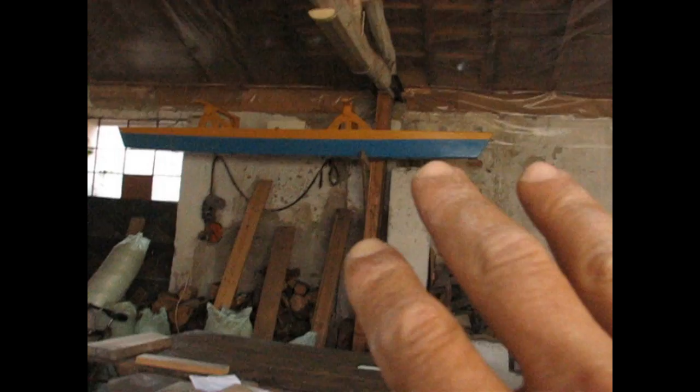This is almost, I mean, there's a 4-meter ama, that's Make or Break's ama. It's got some of these characteristics in it and it works well, so I've enhanced stuff over here and I've gone to this. So basically it's a V hull up to here, and then there's a flat bottom so it can accept a dagger, and then it's a V hull again.

So I always like rake on bows. It helps, it guides the bow up the wave. And then I like it when it builds flare. I like it building a lot of flare pretty soon. So then the volume brings you up again.

Then I like a little bit, okay, so I've used less rocker in the past. I've used more rocker on Crystal Clear, and then later on I've used less rocker. Now I'm back to a little bit more rocker. Rocker again helps you up.

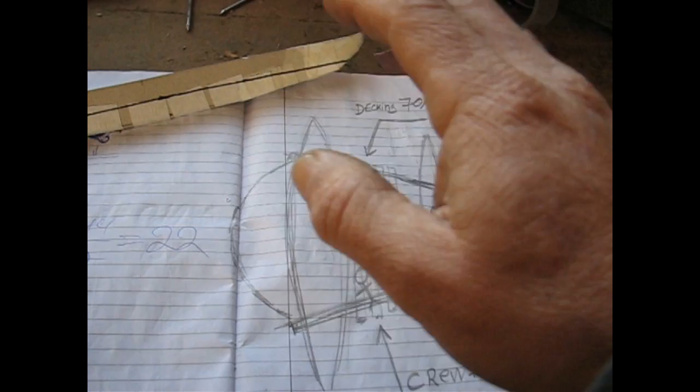So before I build my cardboard models, I will roughly know the sizes and the volumes I need, because I will do this. This is a quick calculation that will tell me how much weight this ama will have to carry, including itself, and what volume it will have to have at waterline. So I'll draw out the whole boat, roughly to scale, doesn't have to be very perfect.

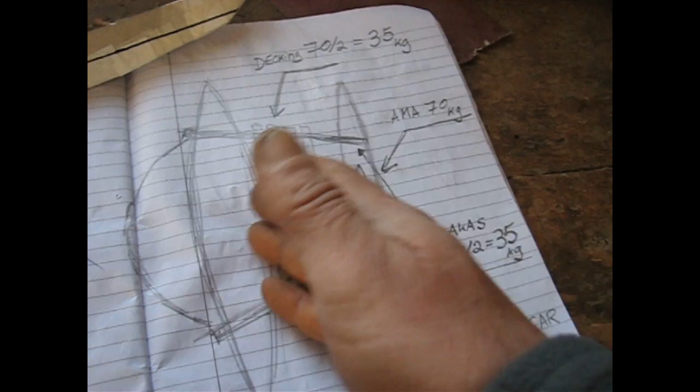And I'll start calculating the weights that are coming onto this ama. So I've got over here decking. I've come to the weight of my decking. I've calculated everything. I know the weights of the materials, and I know how big it's going to be and stuff. 70 kilos of decking divided by 2 is 35 kilos coming onto the ama, because half the weight of the decking is going onto the vaka.

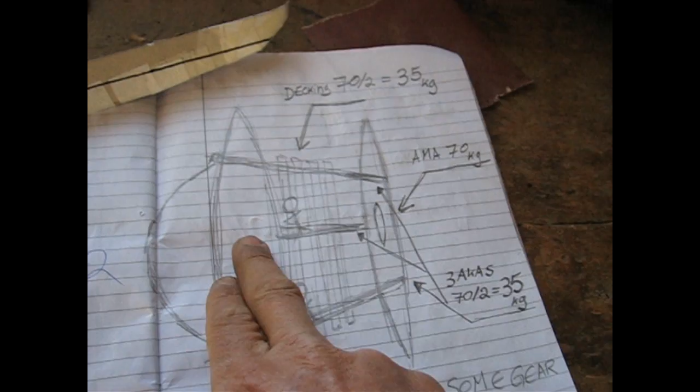Then the ama itself, I'll calculate the amount of plywood and figure out its weight, and I'll calculate the weight of the dagger board, and I'll find all the weights over here involved, and I'll come out with 70 kilos.

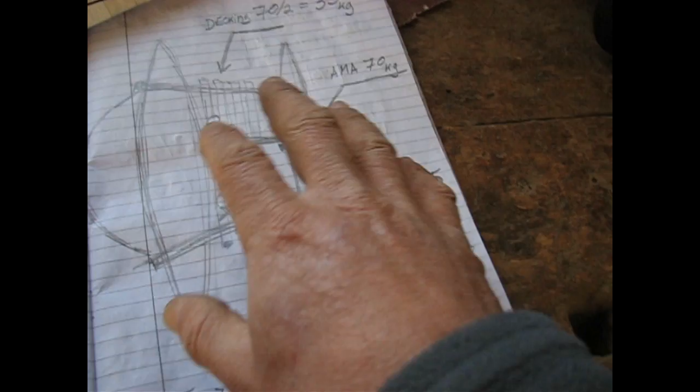Then I'll take the akas. I've calculated the weight of my akas. I know how big they're going to be and stuff. So I come out with 3 akas, 70 kilos. That again I will divide by 2 and come to 35, because only half of the weight of the akas is onto the ama.

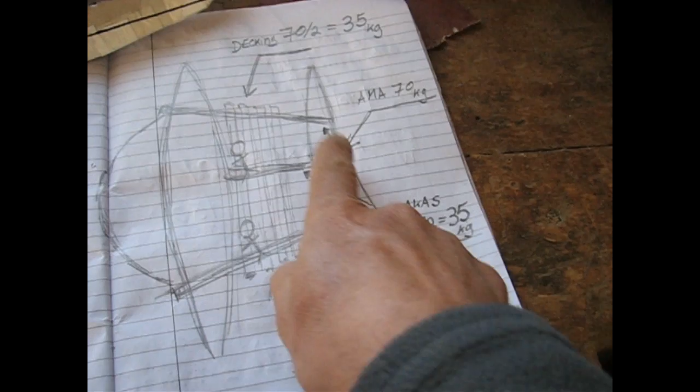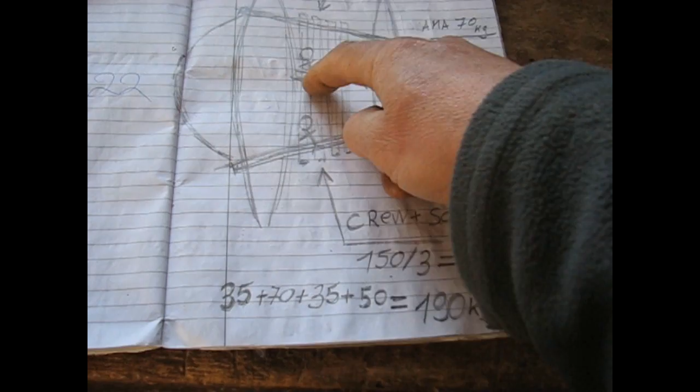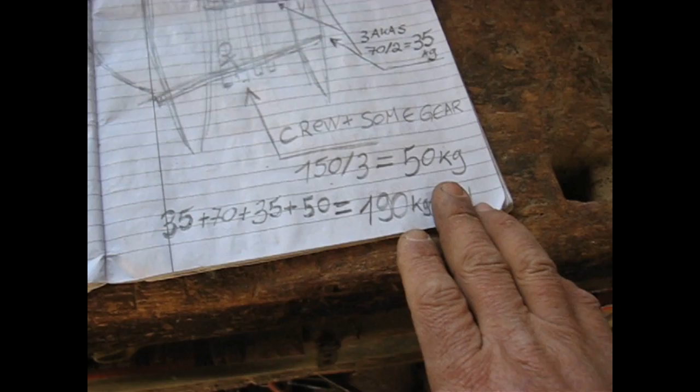Then I'll put crew and gear, because I might have some anchors over here, boxes with anchors and stuff. So the two of us, me and Zhenya, will be 120 kilos. So let's say I'm allowing for another 30 kilos of gear that will be here in this area of the boat. But because this is not in the middle, it's closer to the vaka, this weight, which is 150 kilos, I'm going to divide it by 3, and I'll come out with 50 kilos. And there you have it. So it's 35 plus 70 plus 35 plus 50 comes out to 190 kilos.

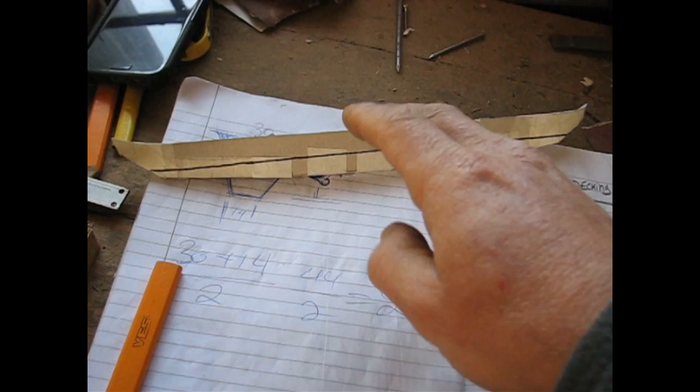I know that this ama at waterline must have 180 liters of displacement. Now, once I've built the ama, I can measure and make sure it's there, and if it's not there, I'll make it again. So this ama is there, and I'll show you how I calculate volume now. Okay, so let's calculate the volume of this ama at waterline and see what we have.

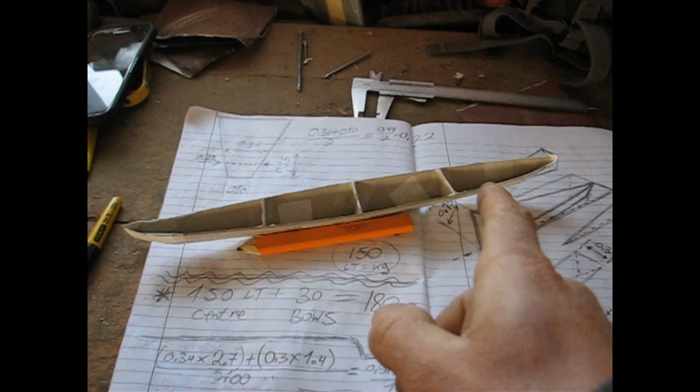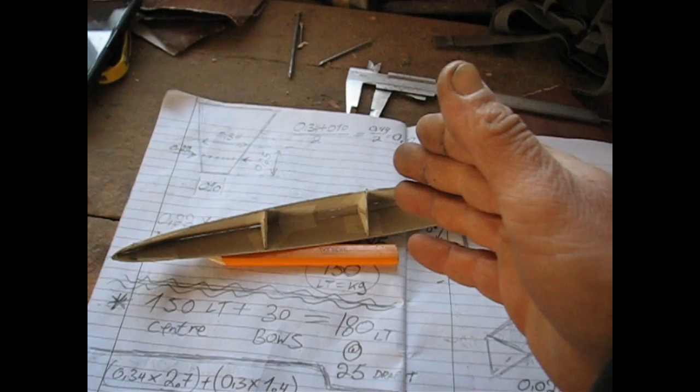So this is what I love about proas, they're symmetrical. So these two compartments are identical, and then that bow and that bow are identical. Okay, so let's start off with these guys, the easy ones. So over here it's narrow, over here it's wide, this compartment. So I'll work on the middle. I want averages. I want to just average everything out. I'm not looking to be super perfect, and this is how I've done it many times, and it's always worked. So I'm sure that this is just fine. So that's the average. We're going to work on the middle.

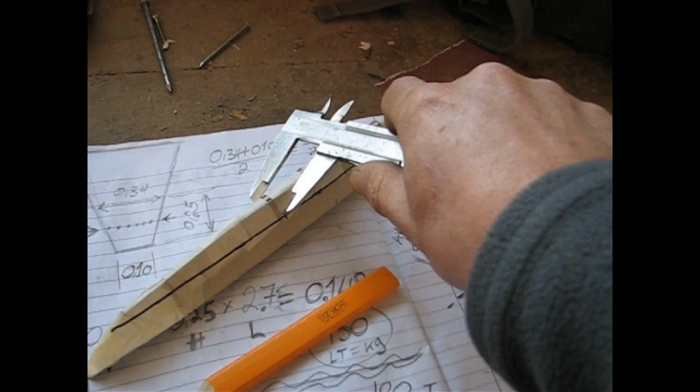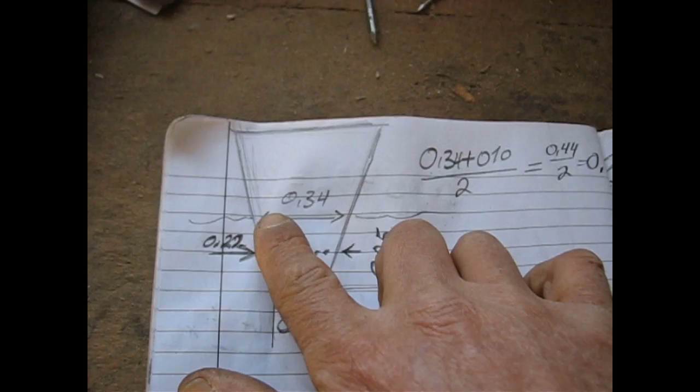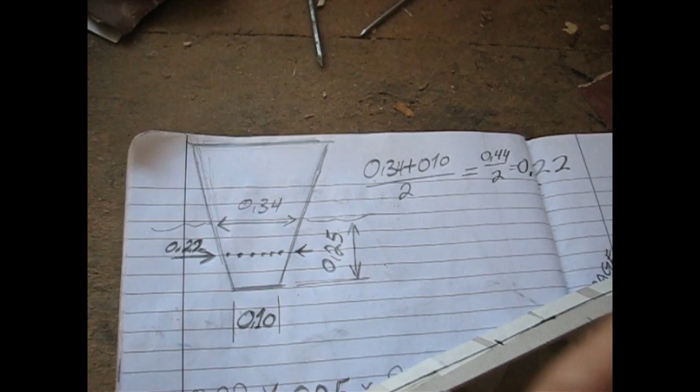So here's the middle line, and here's my water line. Pick up a pair of calipers. I'm looking through the camera, so things are kind of slightly hard, but that's okay. And let's say I'll measure this, okay? I'll just measure it like that to water line, exactly in the middle. And I came out with 34 centimeters. I'm working in meters, so I divide everything by 100, because I'm looking for cubic meters, which is a ton of water.

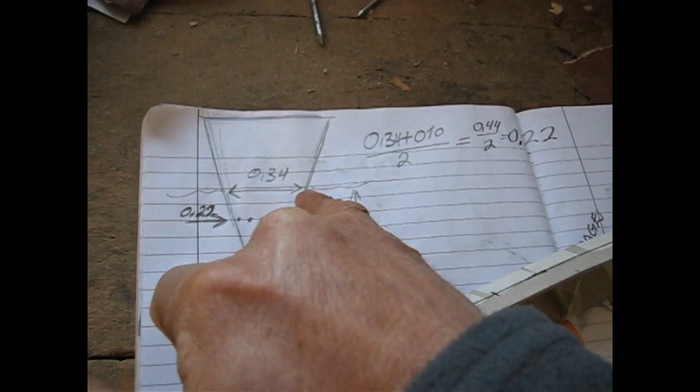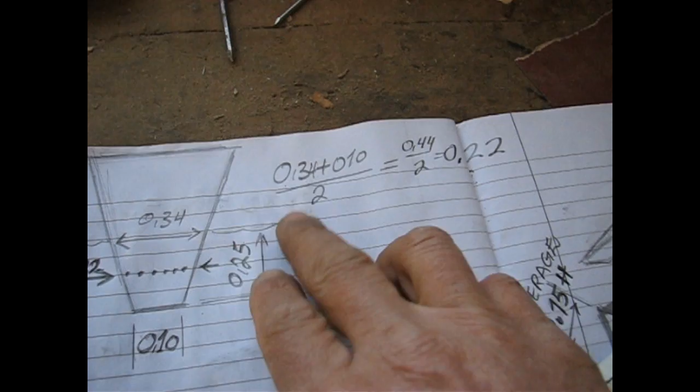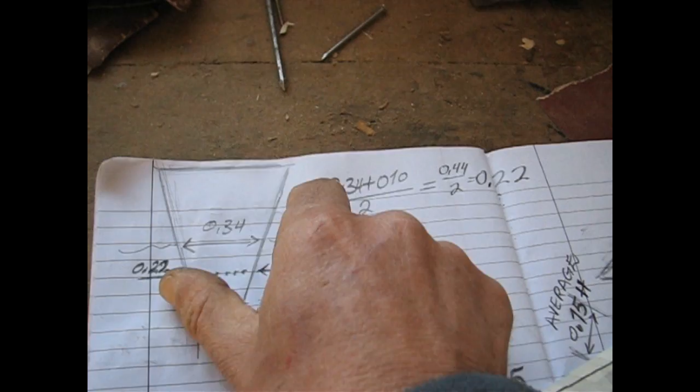Okay, so 34 centimeters is at waterline, the width of the ama. At the bottom I've got 0.10, the bottom of the ama in the same area over here in the middle. This is 10 centimeters. Okay, good. So now the average is very simple. It's 0.34 plus 0.10 divided by 2, which is 0.22. That's my average width to my water line, which will give me now the whole thing.

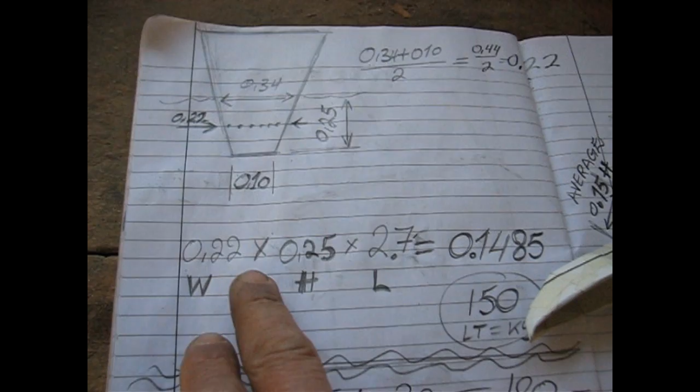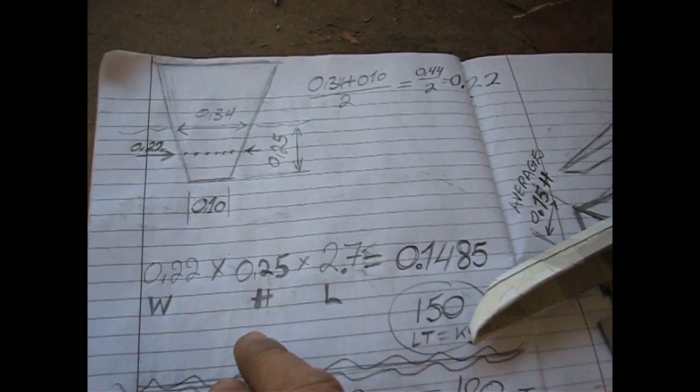Now, all I have to do is 0.22 times 0.25, because 25 is my water line. That's how much this ama draws over there. Come out with 0.25, and then times 2.7 meters. Why am I doing 2.7 meters? Because I'm just doing it straight from here all the way to here. Because like I said, they are identical, so I might as well just go 2.7 meters, which is from here to here.

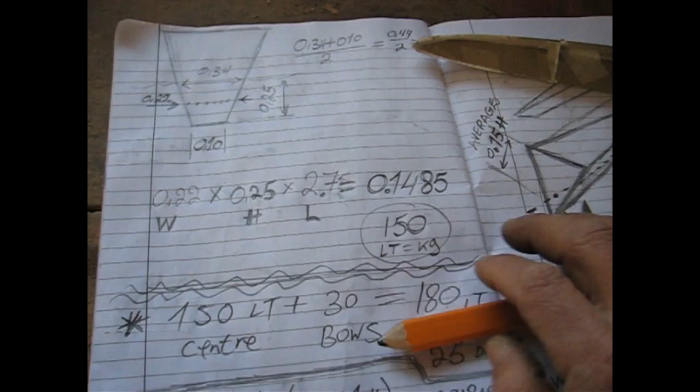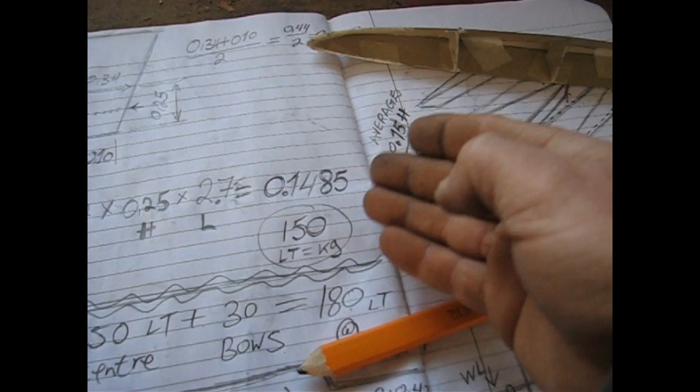And then I do that, and I come out with this figure, which is how many liters it will hold, which is 150 liters roughly, which equals kilograms. So that's my volume, okay? That ama in these two center compartments will hold 150 liters to waterline. Good, let's continue working now. Now I've got the bows. The bows are a little bit more messy.

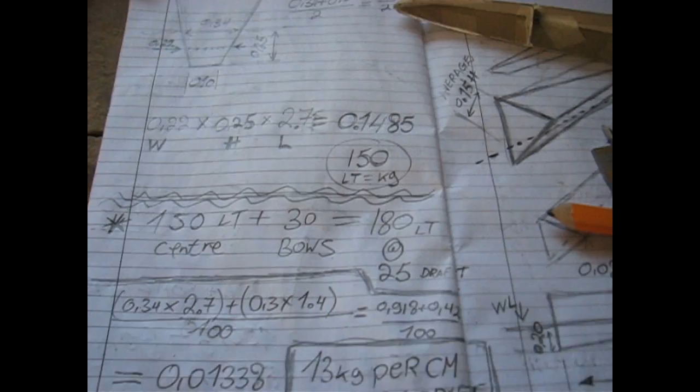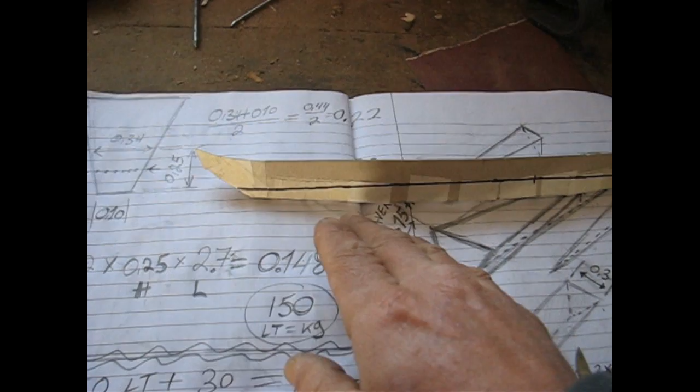So I've drawn a bow, and the bow's got rocker, okay. Now rocker messes up life a little bit, so we're going to look for an average height of the draft over here. We don't want to work on full draft, we don't want to work on minimum draft, we want to work on a center draft, and then we're coming out roughly good. So we're looking for the average over here.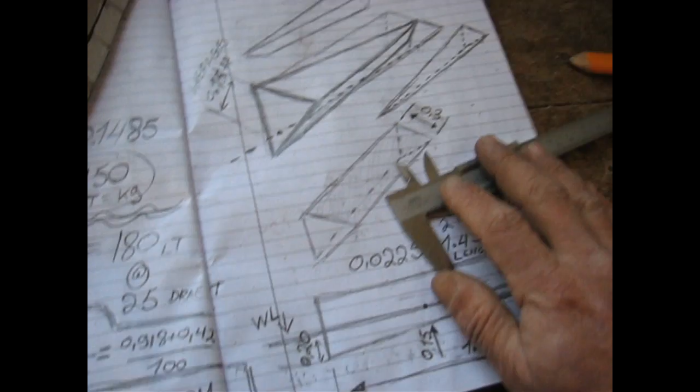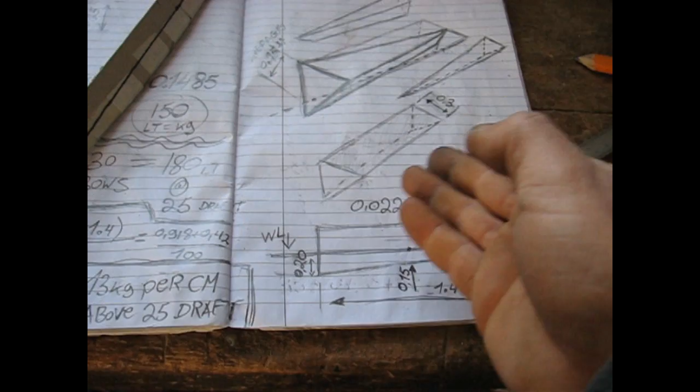But first I want to explain the two bows together, because if I take the one bow and the other bow, cut it down the middle and put one here and one here, I'm coming out with a triangle cylinder, whatever this thing's called. So if I'm coming out with a triangle cylinder, I'm ready to go, it's a piece of cake, okay? But I still need my average waterline, which is over here somewhere.

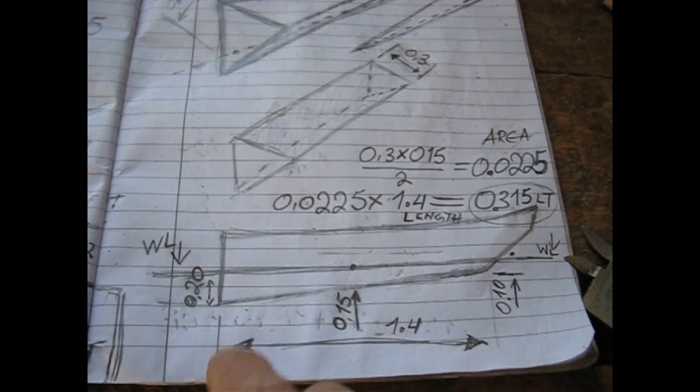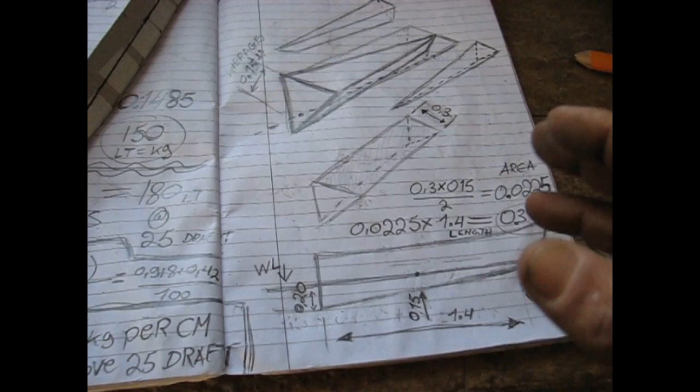So I got 10 centimeters over here of draft, and I've got 20 centimeters over here of draft. So that would give me 0.15 of draft in the middle. It does mess up the triangle slightly, but these mistakes are nothing. You can just neglect all these little mess ups. They really don't matter. They are so minor that it's 10% here or there. It just doesn't matter. So let's say that's the height of this triangle. I'm going to make it 0.15.

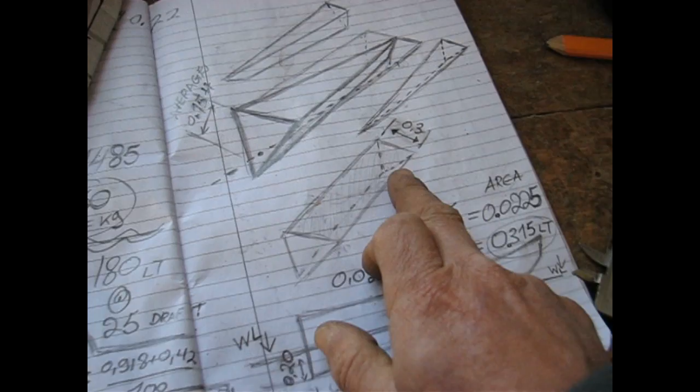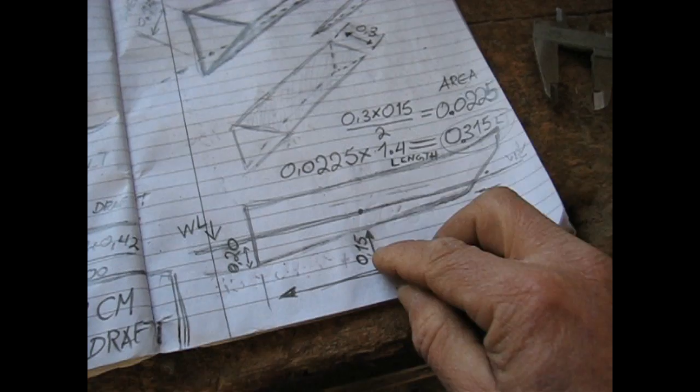Okay. So then I measure my ama at the top over here. And I come out with 0.3. I do that again with the calipers. I'll measure exactly over here, exactly at the bulkhead, where the ama is the widest, and at the waterline. And I came out with 0.3. So that's my cylinder. It's a 0.15 by a 0.3 by its length.

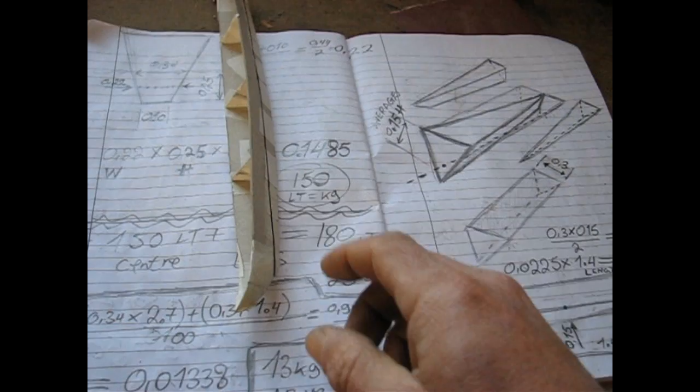Now the length, I'm going to use only the length of one bow. I'm going to do 1.4 meters, which is the length of only one bow, because the other bow I've cut in half and I've put it onto both sides of it. So basically I need width, depth, length, and I'm ready to go.

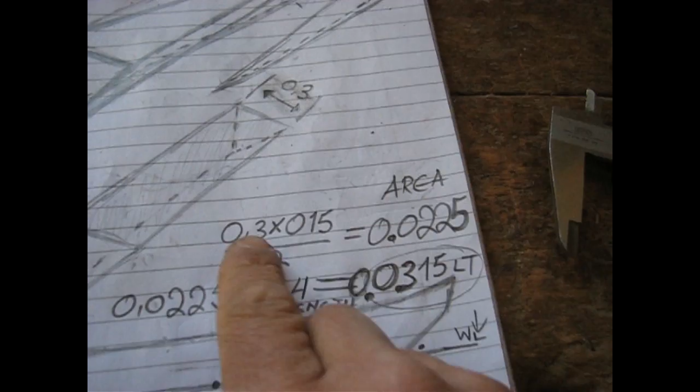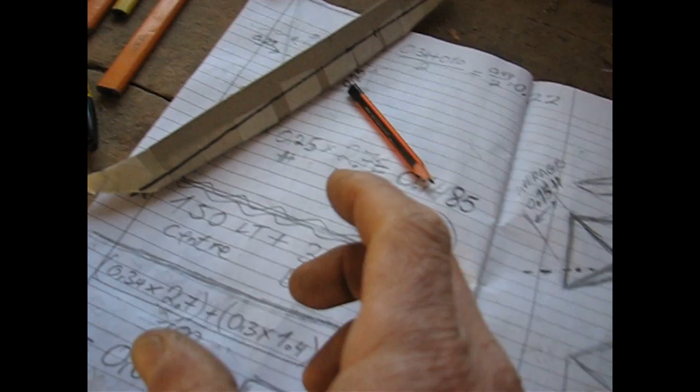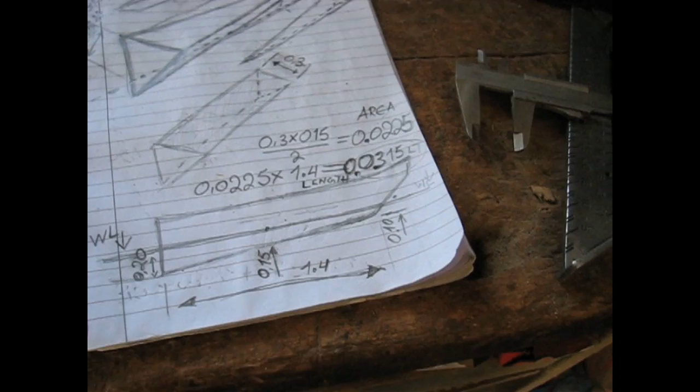Now I'll take that figure and times it by 1.4. 1.4 is the length of only one bow, because like I said, I'm taking another bow and putting it onto here, so I'm not going to do the two bows, only one of them, which is 1.4 meters. And I do that times 1.4 and come out with 0.0315. So that's volume. That's 31.5 liters of volume on both my bows. Okay.

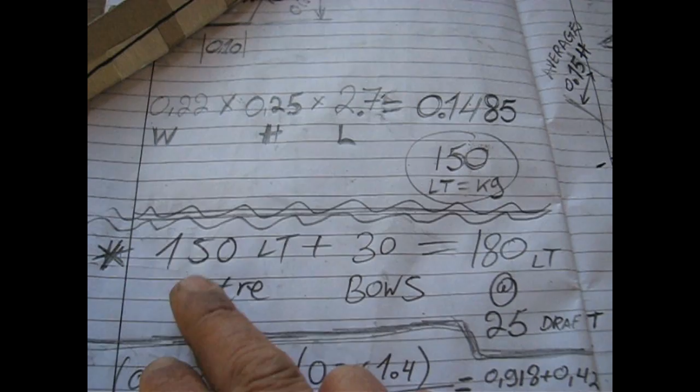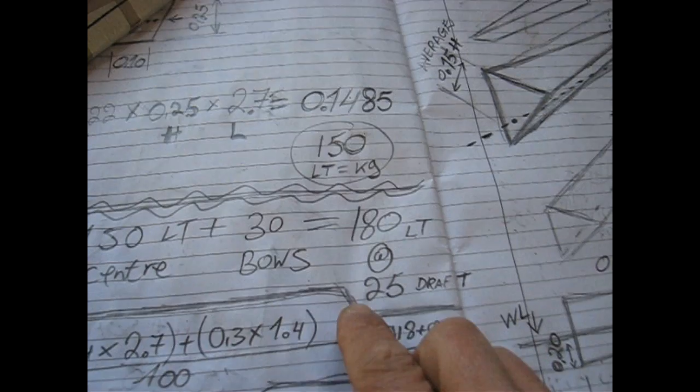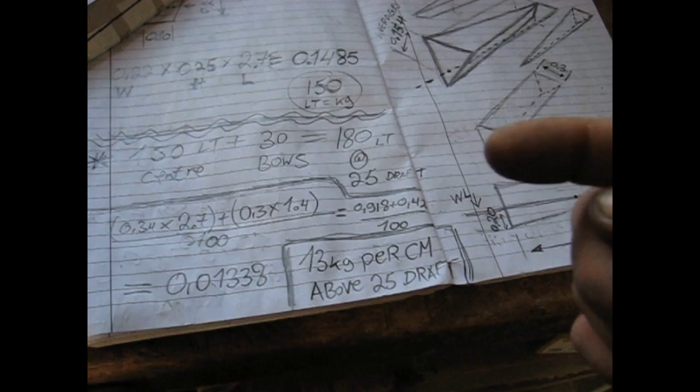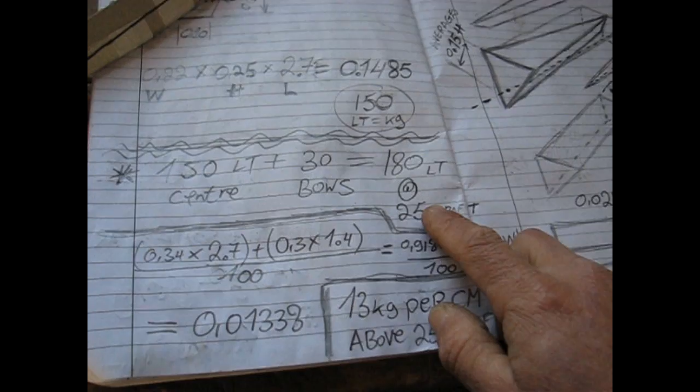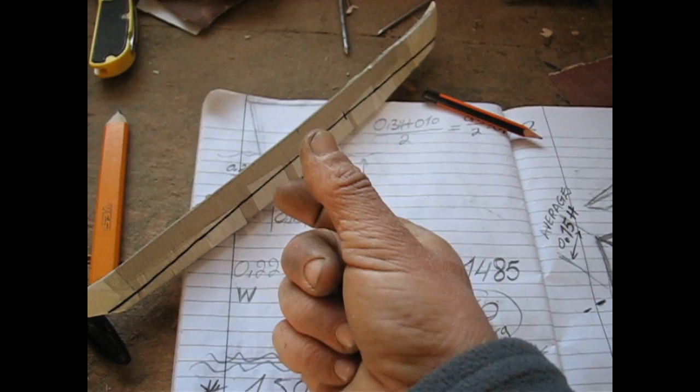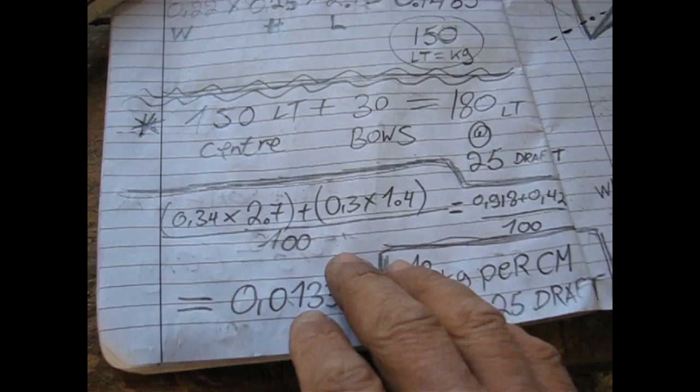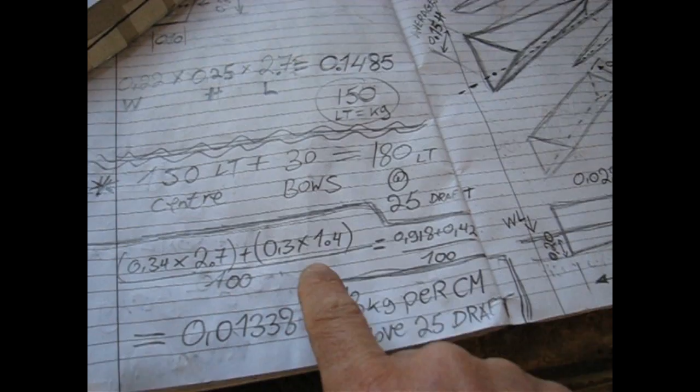Okay, so basically now it's 0.34 times 2.7, which is the full length. The full width over here for the two middle compartments is 34 at the top, because we're going now only up 1 centimeter at a time. So 0.34 times 2.7. And then the bow ones, the two of them is 0.3, which is the widest section at waterline, but only times 1.4 meters again, same deal.

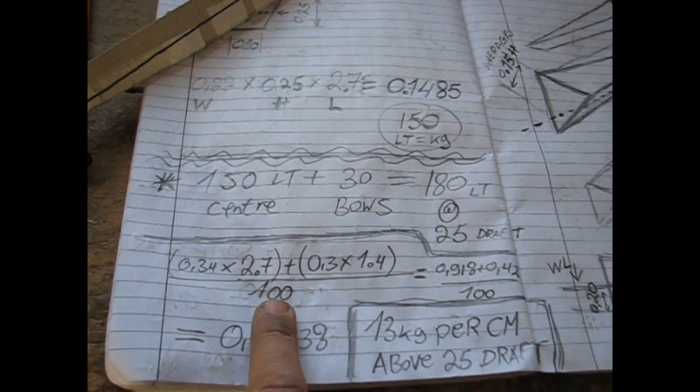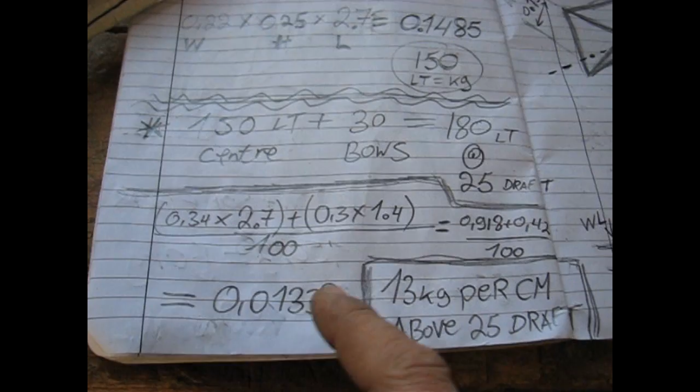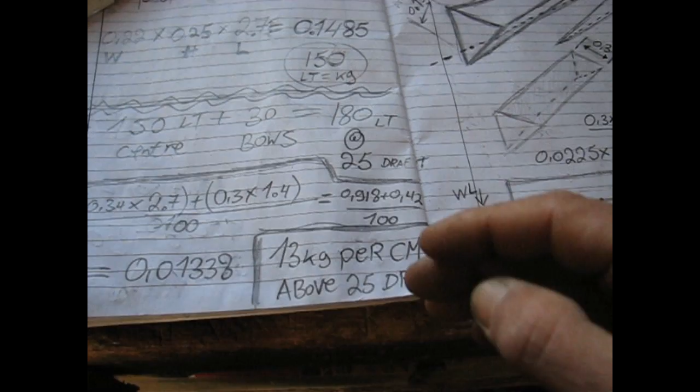This times this times that, this plus this and that, divided by 100. You've got to divide by 100 now, and then I come out with 0.01338. So that's 13 liters per centimeter. That means that when you load this ama, it takes 13 kilos for every centimeter of draft after waterline.

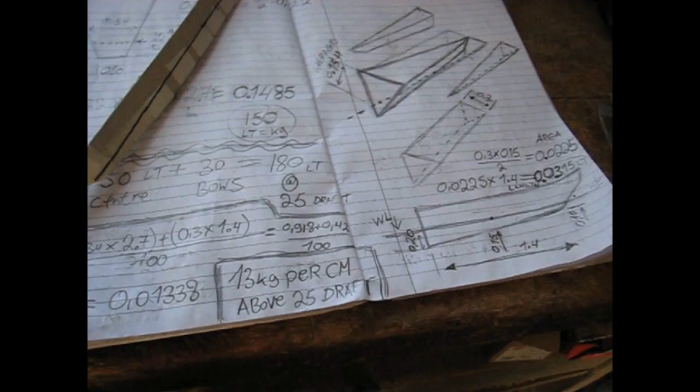Now because there's quite a lot of flare on this ama, the first centimeter will be 13, the second centimeter will probably be 14, 15, the next one probably 16, 17, I don't know. On proas, you really have to know your volumes. You really have to be good on your waterline, because if you don't, then your proa is going to float like this or like that.

It's not a catamaran where it's all the same, so it will always float like that, unless you've loaded it stupid. But on a proa, if you can't do the calculations of how high to make those, what's the span between the aka and the hull, if you can't calculate volumes, you can't come to that either.

I find this way of boat design to be just simpler. Instead of drawing pictures where you can only imagine this is going to work or it's not going to work, this just seems like the easy way to go. You have a model, it's working, it's showing you what's happening, you can see it actually doing it, and then you can come out with your numbers. You just measure now, you're not even thinking anymore, you just find a way to measure it and you keep going.

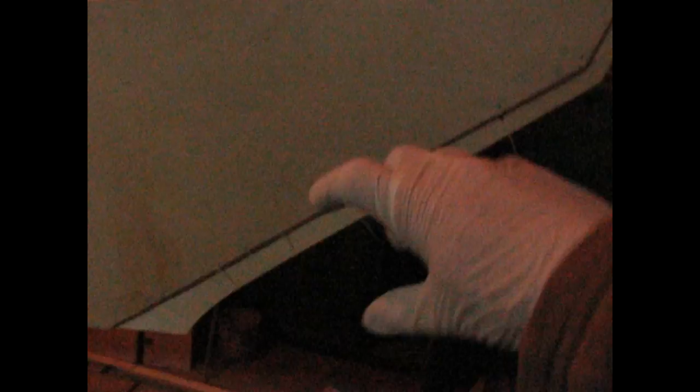And then I put in stems. This is a James Wharram idea, and I really like these stems because basically it comes. I mean, it's coming to about here inside. So that's a lot of protection. So if I bang into something, I'll probably break this. I might even break to here, but I'm definitely not going to go in because the fillet comes all the way to here. So there's a lot of bow on this thing, eh?

Let's wrap this thing up. It's about, I don't know, it's 2nd of March or something, or 3rd of March, and it's 8 o'clock in the evening, and the fireplace is going, and we got to finish this build. This boat has to sail this year.